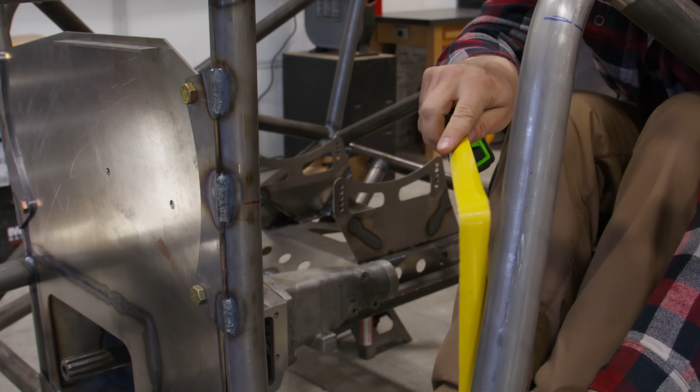So we got 17 inches. I'm gonna go ahead and mark that 17 inches here.

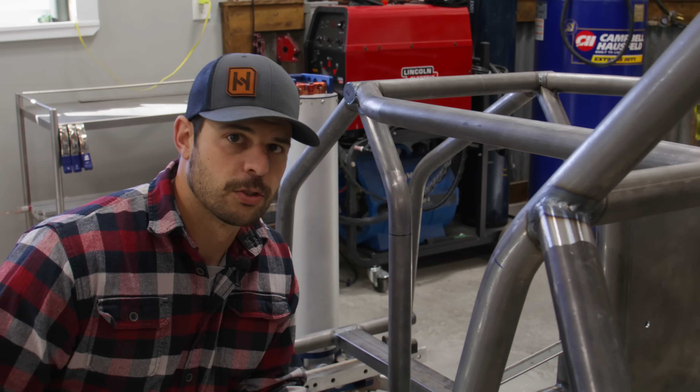Perfect. Next part, we're gonna be making the cardboard template that'll fit that. So we're gonna start by figuring out where the holes are that we need to have inside the sheet metal template to transfer onto our cardboard. We'll come up here with a level and hold it somewhat similar to where we just made those marks for the pedal height.

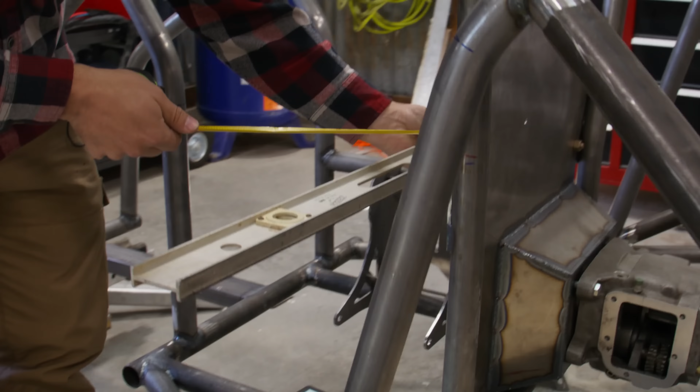Since this bar is kind of kicked out on the bottom and on an angle, we gotta figure out where this location is in comparison to this location. So I'm gonna come in here and make a measurement - it's 3 inches.

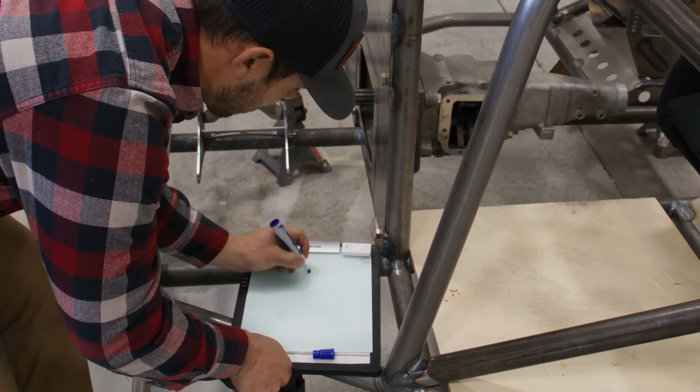So we're gonna come down here to the handy dandy whiteboard and draw our 2 holes. We're making a measurement from here to here - this measurement is 3 inches. The last measurement we need is a center to center in this direction.

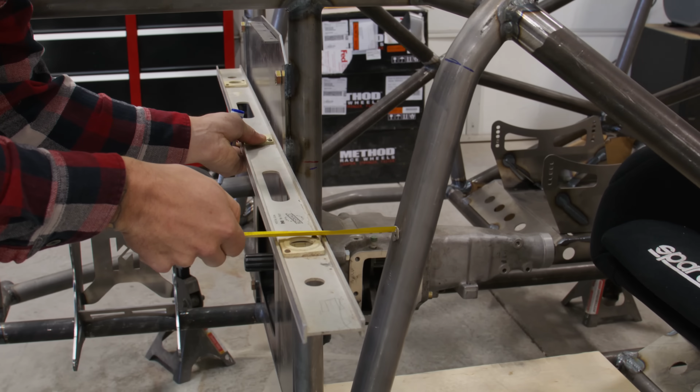So we're gonna come back to our hole, make a mark, and kind of line it up. The cardboard template's getting close right now. Then we're gonna come back in with our CAD work and be a little bit more precise.

Transfer these measurements down here off of our level. I got about 11 3/4. So now we have these.

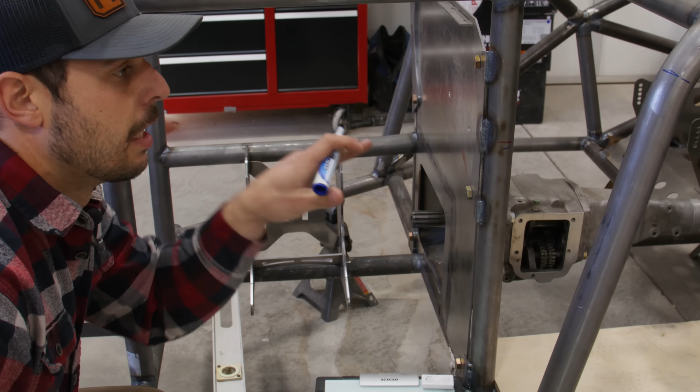We're gonna go ahead and take these measurements and transfer them to the cardboard. Get that cardboard template in here, do any trimming that we need to do, then we'll go to the CAD.

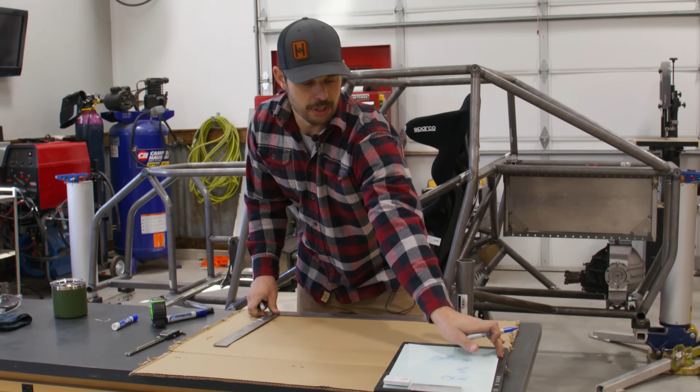So now we're gonna be taking those measurements that we just took and bring them down to the cardboard. We need a square, because the measurements we took are nice square measurements. I'm gonna use 2 different Sharpies to make it a little bit clearer. The 2 measurements we took were 11 3/4, and from center to center of the tubes on the horizontal axis. Then we're gonna take a 3-inch measurement up to the bottom, or the tangential part of that tube, and mark that location.

Lastly, we just need a little bit of space around these. So we're gonna add some space around them for the template, so we want about 1/3 of engagement on both sides, here and here.

We're gonna cut this template out, take it, put it in the car, and then make any adjustments that we need before we take it to the CAD.

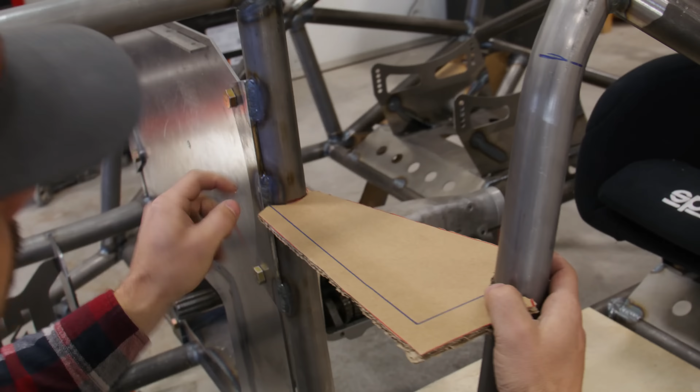So now that we got the cardboard cut out, we're gonna go ahead and put that in the car and check those measurements that we just took. We're gonna line those measurements up with those lines that we drew earlier when we had the brake pedal up.

Now we can see that we have a nice, decent tight fit on both sides, which means our measurements are close. Since we're happy with those measurements, we're gonna take them now, go to CAD, and draw them up.

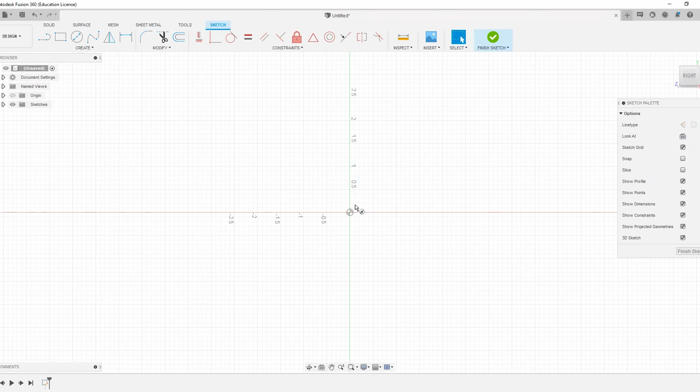So we have our cardboard design, and we know where our 2 locations are that fit pretty well. We need to take this and get it into the computer so we can start either doing a paper model or maybe a harder template model that we can justify. Then we'll go to SendCutSend.

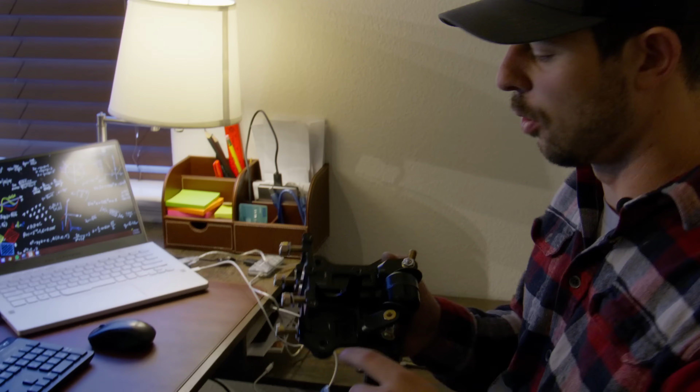Now that we have those 2 located, what we want to do next is measure the hole pattern of the bolts for our brake pedal, as well as any clearances we're gonna need at the bottom of the part, and apply those to this design.

So I spent some time, and now I have a hole pattern that matches my brake pedal and a slot that allows the brake pedal to go through the entire assembly.

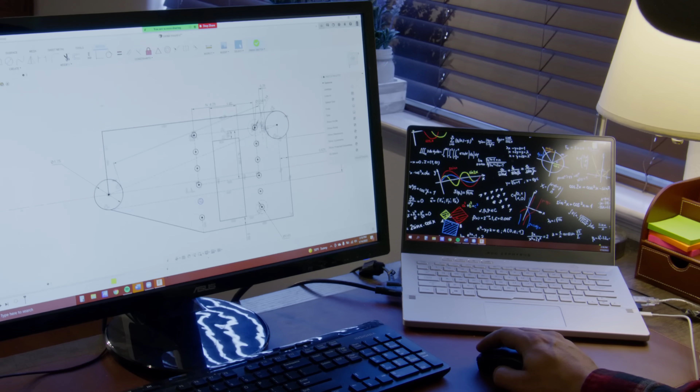So if we look here, I have a hole pattern that's every half inch. Since it's a 4-hole pattern, it's gonna allow us to have 3 different orientations and an inch difference in front to back orientation.

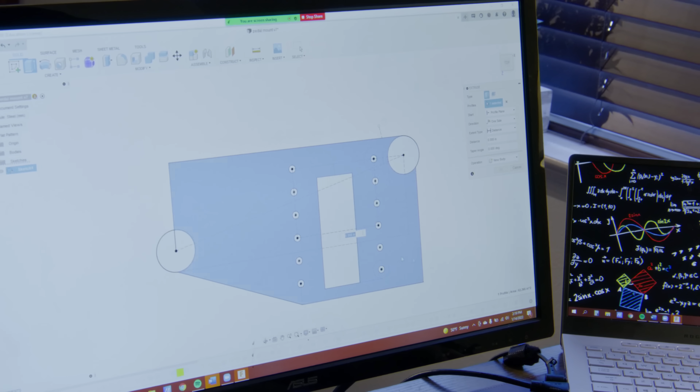This slot is also just fitted to the brake pedal that we're gonna be using. So typically what we're gonna do is finish this sketch, create a solid off of it, and roll this up. I'm gonna be making this out of 0.135 steel, so I'll go ahead and use that as my dimension.

Sorry, my body's selected. We're gonna hide that sketch. Now you can kind of see how this part's starting to form in a 3D sense. We have these holes in their pattern, the brake pedal clearance, as well as the two tubes that we're gonna be trying to tie into.

Now the next step is we're gonna create a DXF. If you're gonna be using a paper doll model, now is the time you can create a sketch or a drawing off your CAD software, make a one-to-one drawing, print that out, apply that paper doll onto a piece of cardboard or wood, and transfer that template onto the wood or cardboard to use as your template.

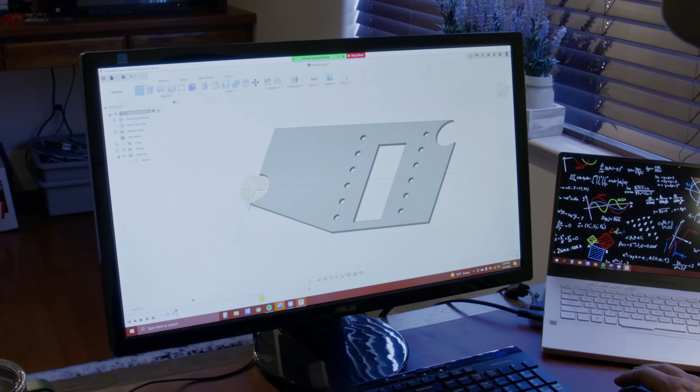For me, I'm gonna be using a CO2 laser that I have in my shop. I'm gonna be cutting out some thin wood that I got from a box store to use as the template. So to do that, we come back in, I create a sketch on this and finish it. This sketch creates an outline of what we just made, and that's what SendCutSend can use from us, and that's also what a CO2 laser will use.

So in this software that I'm using, I simply right-click, save as a DXF, and save it to the flash drive. Now that we have that DXF saved to the flash drive, we're gonna take that to my CO2 laser, cut this out, and do our first fit to figure out where that pedal needs to be front to back.

So we're back at the car now. I got the brake pedal and that freshly cut wood part that we just did on my CO2 laser. I'm gonna check the fit of this template before we get it in the car, to see if we have any interference. We're gonna go ahead and put it in here.

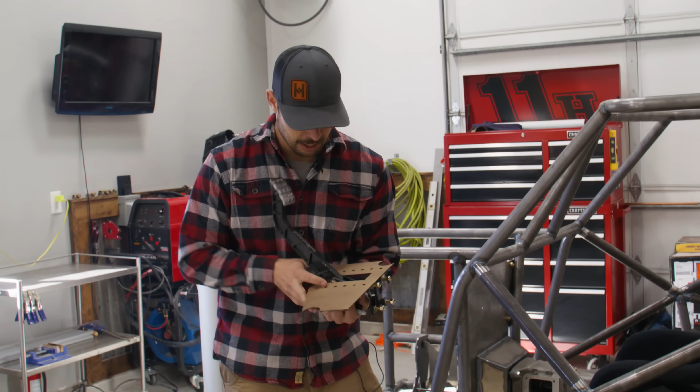And we do have a little bit of interference right here. There's a little pin that holds the pedal, so we're gonna have to make a little bit of a modification. We'll probably just take a little piece out like that on each side, get this pedal fitting in there nicely. Then we're gonna check it all in the car, figure out that back and forth pedal position, and then go to the final design.

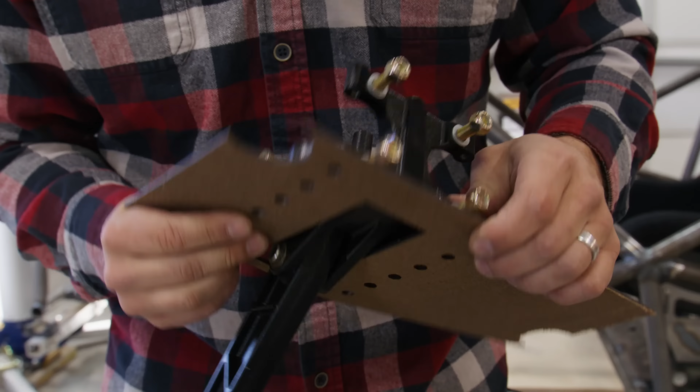So we do have a little bit more interference here. I didn't take into account for the bottom mounts of the master cylinders, but I think right now we can still use this template. We're gonna get it in there. What we're looking for is just knowing which hole pattern we're gonna be using so I can get rid of the rest of the holes, and then we'll add in the clearance for those master cylinder bolt holes.

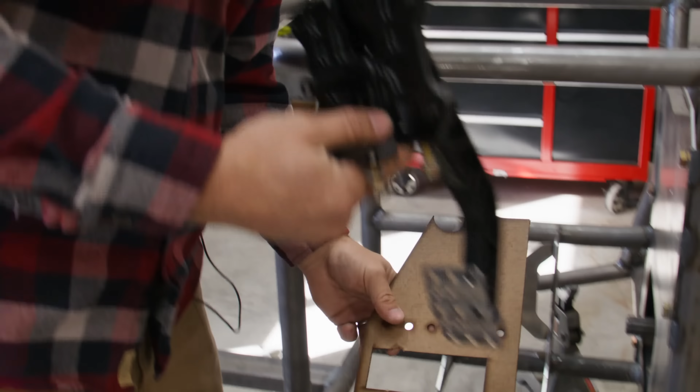So we're gonna take this, we'll take the pedal back out right now. A lot of times as we check this fit, we have a little bit of interference right here also, a little bit on that weld joint. So let's take our knife real quick and knock off that corner.

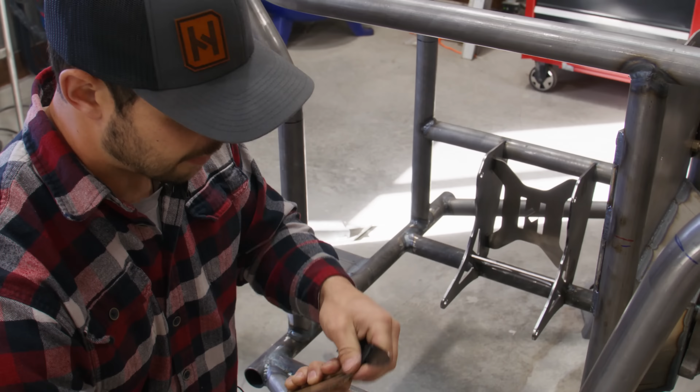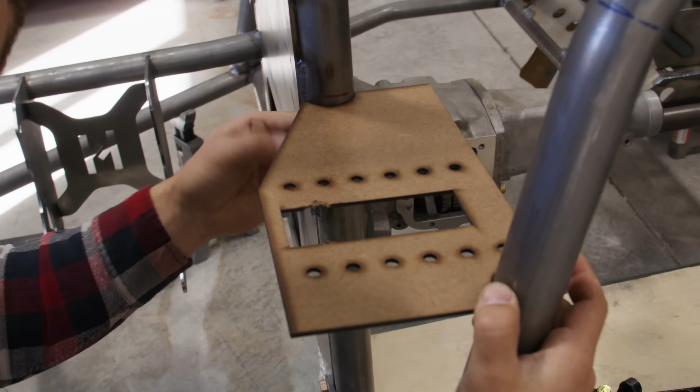This is all stuff that as we do this, we're gonna make sure that in our final design a lot of this is taken care of. Let's double check that part one more time. There we go, now we're fitting nicely.

So a lot of these little tight joints right here, since this bar is coming at an angle, it's a little bit extra tight right here. What I like to do is leave those corners really tight, and then when we get that laser cut part in metal, we'll do that final trimming in the metal so we have a nice tight joint and don't have to use as much filler.

The next step, now that we have this in here and it's held in place, is I like to use a hot glue gun. We're gonna hot glue some gussets in here so this piece is held in the manner that we want. We'll put the brake pedal in there and figure out that location, hold this up in here, and squeeze some hot glue.

We're going to let that glue cure up a little bit, add some tape to reinforce the joints, and then we'll get it in the car and figure out where that brake pedal needs to be.

So the design is in, it's reinforced for us to check that back and front. I'm going to have my buddy here help as we install the brake pedal while I'm sitting in the car.

There we go. We're going to start at the front hole and just kind of work back and forth to see what's right. Go ahead and move that back a little bit, Drew. Yeah, that feels about right.

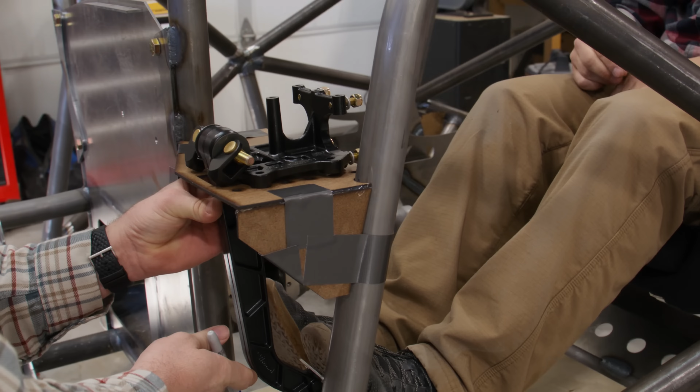So now that we have the holes kind of determined, we're going to go ahead and mark which ones so we don't forget, and let's mark these ones too here in the front, make sure. There we go, perfect.

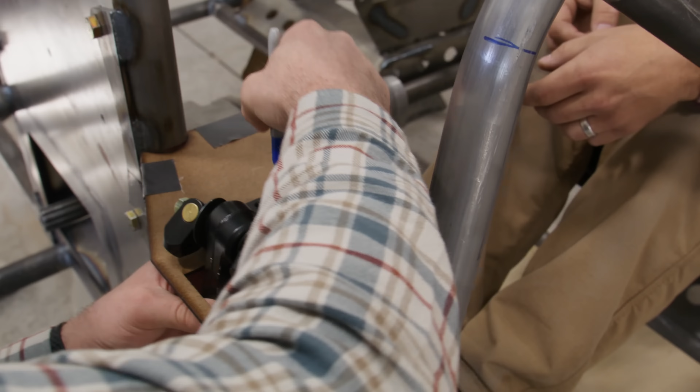Okay, so now we're going to go back to the CAD. We're going to take those hole patterns and all the little interferences that we learned, and start working on that final design so we can do one last template, check the fit, get those DXFs to SendCutSend, and get some metal parts started.

So I spent a bunch of time on this design, drank some whiskey. I think we're all good to go now.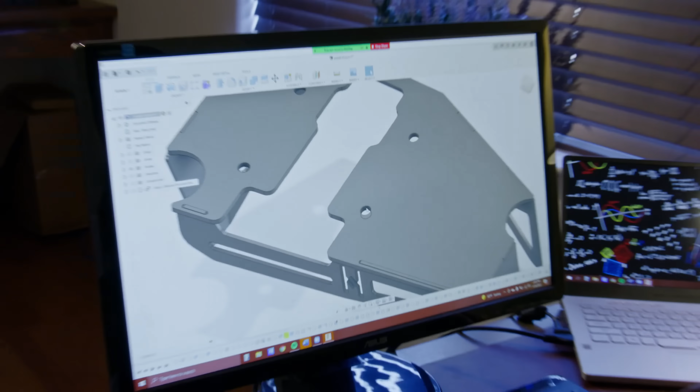So I want to talk about a couple specific things I did with this design that are important to think about. Firstly, typically with hole sizes for bolts, I either take the bolt dimension or the hole size of the part I'm using. In this case, since we're mounting a brake pedal into this spot, I use the same exact hole size that's actually on the brake pedal itself.

As you can see here, this is a 340 thousandths diameter hole, so my holes are going to be 340 thousandths in my part. That's going to be a 5/16 bolt most likely, so we have plenty of clearance. It doesn't have to be a tight fit, it's a nice loose fit. It's going to be fine.

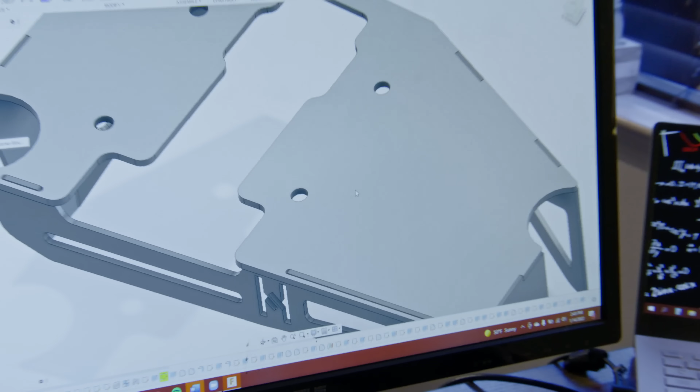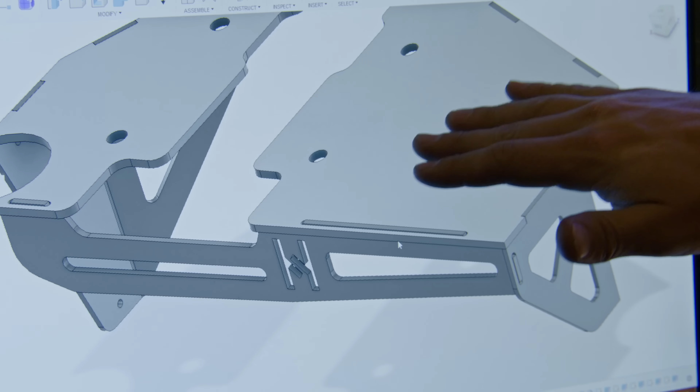Secondly, I used a tab and slot design in this part. That's for a couple different reasons, but mostly for fitment, making it a little easier with less clamps when it comes to welding. That's also going to help create a 90-degree joint in this corner to make sure my brake pedal pad sits nice and flat in the car, as this one right here registers up against the tube, and then this joint right here ties those two together.

But I do want to talk about the tab and slot design in a little more detail, specifically the tolerances on the slots compared to the tabs. So I went on SendCutSend's website and decided I'm going to use 104 thousandths thickness steel.

In my experience that steel comes pretty close to size, but we want a little bit of error between the cut thickness from SendCutSend and the part thickness from the sheet metal. The rule of thumb SendCutSend tends to use is to give 10 thousandths of an inch clearance around your part to make sure it's a slip joint. So if we zoom in on the part, we can see that on each side we have 5 thousandths of an inch.

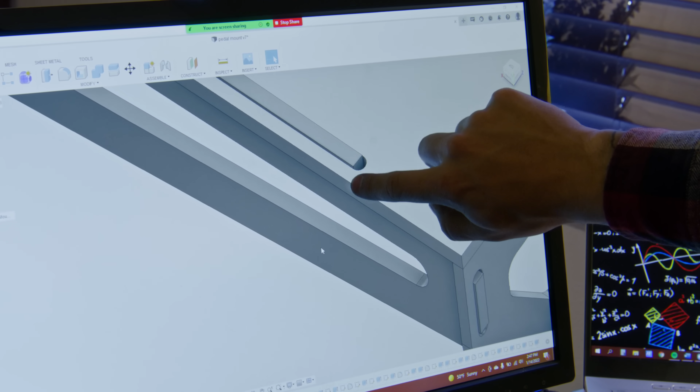And then I also rolled this edge to a half circle. In this part it's not going to see as much stress as the front, but it's a good overall design method since square corners can sometimes create cracking or a weak joint. So if I'm sliding this in and there's any hesitation, I can also bend right here, which will strengthen up this corner. Then we're just going to weld this seam through here.

Another thing I want to talk about is that with that tab and slot, I typically make my tab about 20 to 30 thousandths of an inch taller than the thickness of my material. That allows me to have filler material, so I don't have to feed filler while TIG welding—it's already there. I can just flow those two pieces of metal together and create that fusion weld. It makes it a little easier.

So you can see here I have a 135 thousandths thick part, and you can see how that's a little bit proud of the top of the part. This creates an easier joint. You can also see the same thickness here where I have a little bit of proud stick out, same design on the side here.

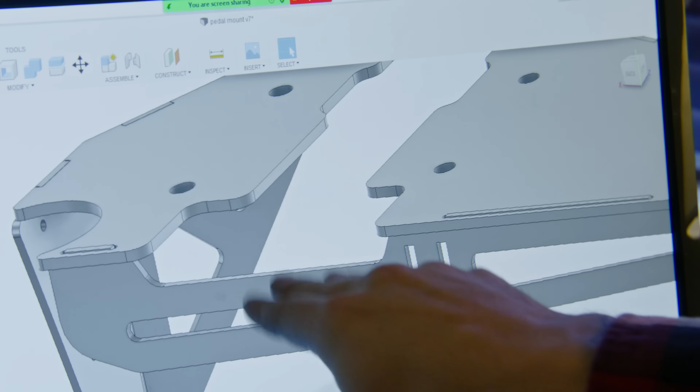This little cutout creates an area in which my master cylinders can slide into the front, because this is a reverse mount pedal. The master cylinders will bolt on right here, creating a little more clearance.

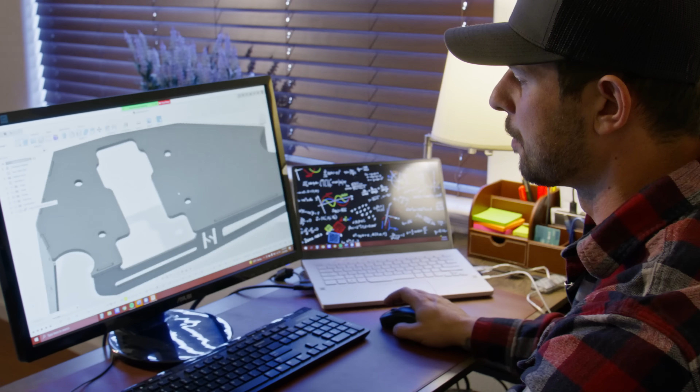Next, I added a bunch of holes for later in the design, for having sheet metal on the foot box. That's for finalizing this area. I added 1/8 inch holes, which will be for 1/8 inch rivets so we can tie the foot box and sheet metal back to this pedal mount.

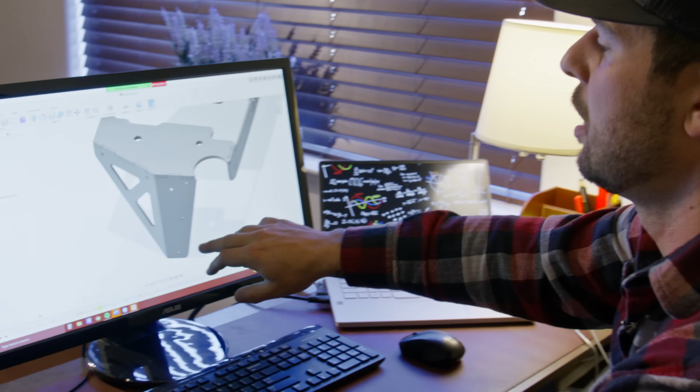So you can see here, I just added straight eighth of an inch holes. SendCutSend typically recommends about 5/1000 of an inch tolerance for hole sizes like this. These will be easy holes for me to chase with an 1/8 inch drill later on, so I'm not too worried about tolerances on these.

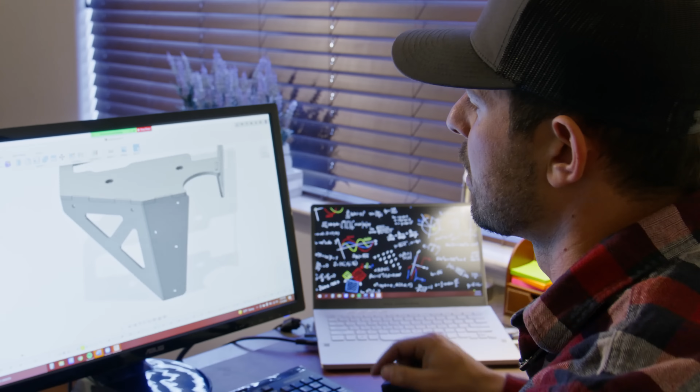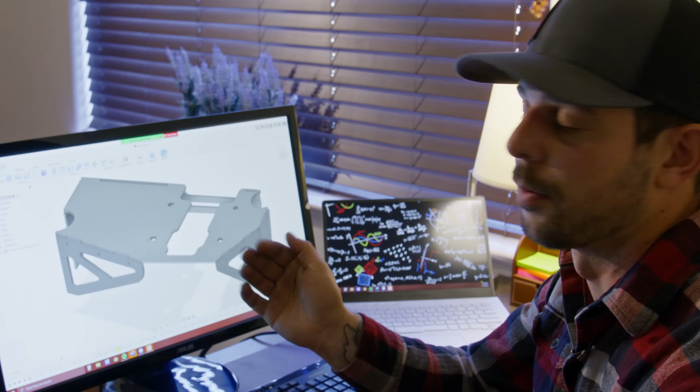I'll fit them to the rivets I'll be using later. If you're going to use specific tight tolerance holes, it's important to give that 5/1000 tolerance over a tight fit hole on a bolt. Look up the sizing chart for a bolt, find the tight fitting hole size, then add about 5/1000 of an inch to make sure the bolt will slip through, unless you can chase it with a drill and you're okay with that. But additional fitment will be required if you play that tight tolerance game.

So that's it for this part. We're going to do the same thing we did with the last template: create DXFs of all these parts, go to my CO2 laser, and cut these parts out of that same wood. We'll install it one last time to double check everything's good, and if so, we don't need to make any changes. We'll send these DXFs out to SendCutSend, they'll cut them out for us, we'll get them back and see how they fit.

If you don't have a CO2 laser, you can do the same method: create a 1-to-1 drawing, translate it to wood, thin plywood, or cardboard, cut them out, and do that same fitment I'm about to do. All we're talking about right now is making sure clearance issues and overall part sizes work, and that the gussets work in the design. See you in the shop.

So we have the final template in the car. I'm pretty happy with the design. We have the tab and slot design in the front for this backbone piece, which ties this area back together that we had to cut out for clearance for the brake pedal.

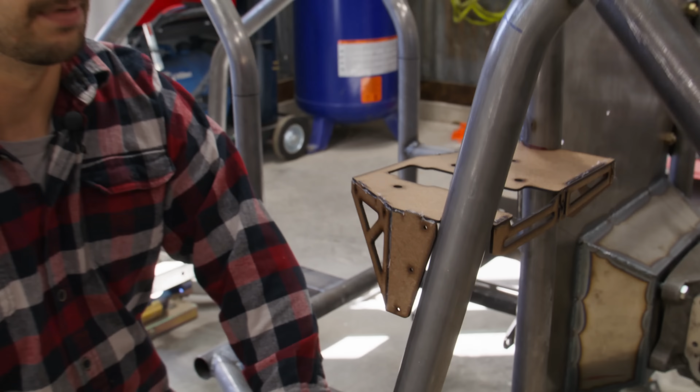We have this bent part here. With the template, I ended up cutting it, bending it in there, and re-gluing it back together. We're going to trust that SendCutSend gets this right for us. We have these extra holes added here and over here also, which will be for the foot box we end up building in later in the design. I think we're ready to send these DXFs to SendCutSend, get our laser cut parts, and get it welded in.

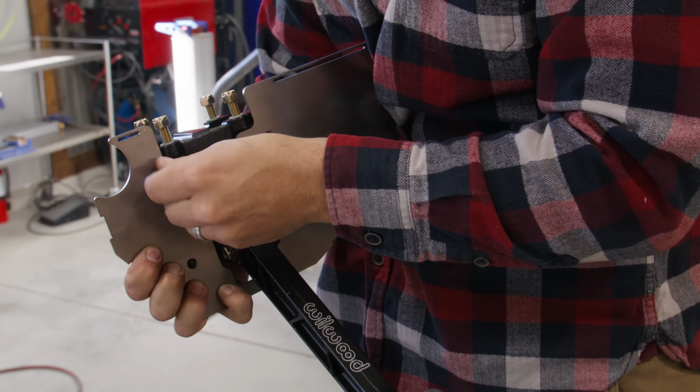So we got all the laser cut steel parts back from SendCutSend, and they're exactly like what we sent them. We're going to get this brake pedal installed onto this plate, make sure all the bolt patterns fit like we want, then install this on the vehicle next.

Everything looks really good. We're using non-nylock bolts right now because we're going to leave this brake pedal in there, keeping everything nice and flat as we weld and tack everything together. Then in final assembly, we'll put grade 8 bolts and nylock nuts in there, get it tightened up, and we'll be ready for the next step.

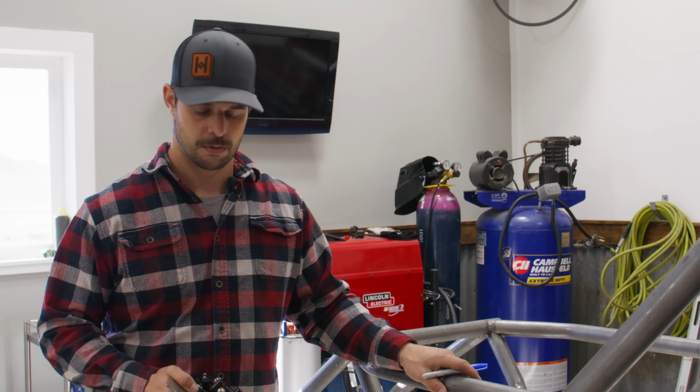Okay, so the brake pedal is now mounted on here. We're going to leave this on with its bolts nice and tight. This is going to keep this thing nice and flat.

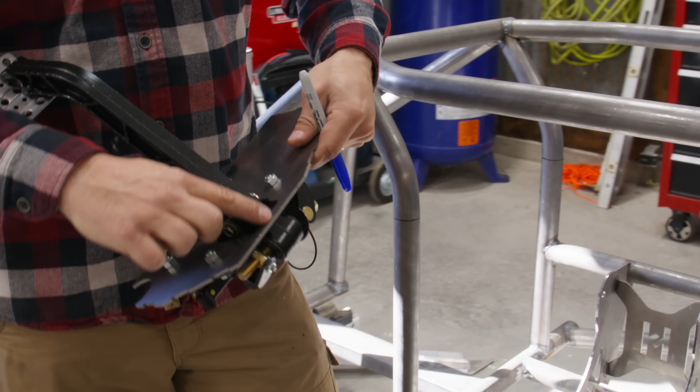It keeps the holes where we want them. Right now, this little web right here in this design is the weak spot. And so since we don't have the front tied in right here with that tab and slot design quite yet, these holes in this brake pedal are gonna keep this thing from getting twisted in a couple different ways as we get it kind of tuned into this chassis.

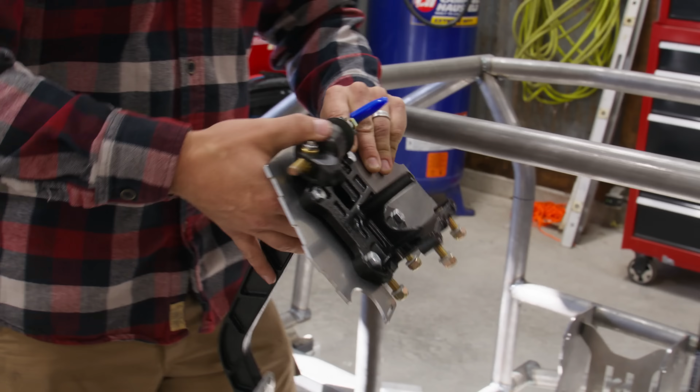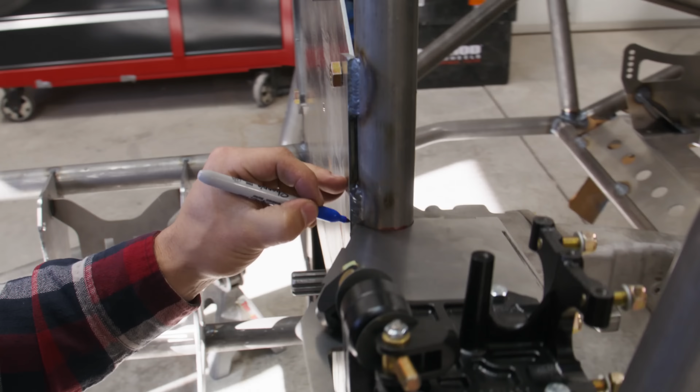So we're gonna go ahead, let's bring it in here. We're gonna bring it and get it down to our lines. So we can see right away, this weld right here, we have a little bit of interference right here. One big thing that we have to remember is that when we do a cardboard template or a wood template, they're much more forgiving than an actual metal part. And so most likely our wood or cardboard template folded right here and I actually didn't see that interference.

So we're gonna just go ahead and mark that. We're just gonna roll this edge away from that. That should give us a little bit more clearance. We can also see right here, this is most likely the same situation where the cardboard template and the wood template gave away. So we're gonna just kind of trace this out. We're gonna use the pipe to our advantage and trace that little thing out.

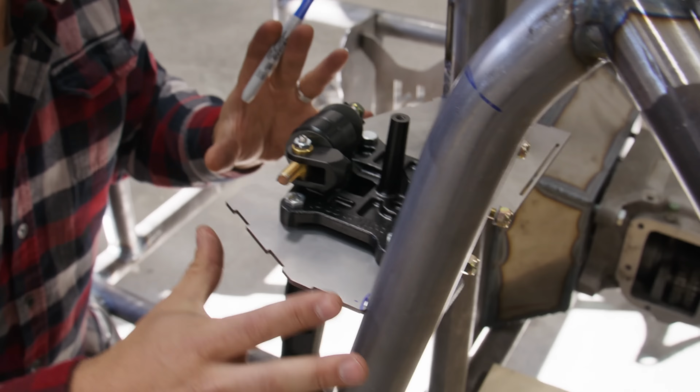Now we're gonna go to the grinder. We're gonna remove that little bit of material. We're gonna slowly work this part in here, get it in nice and flat. We'll throw a couple tack welds and then we're gonna add our gussets into the part, add that tab and slot into the part. Once it's all looking good, we'll finish welding it up.

So we don't want to take too much right now. We just want to slowly work it in. We want to take our time. We had really nice laser cut parts. There's no need to ruin them being too hasty with it. So let's come back over. We'll check those 2 spots that we just worked on.

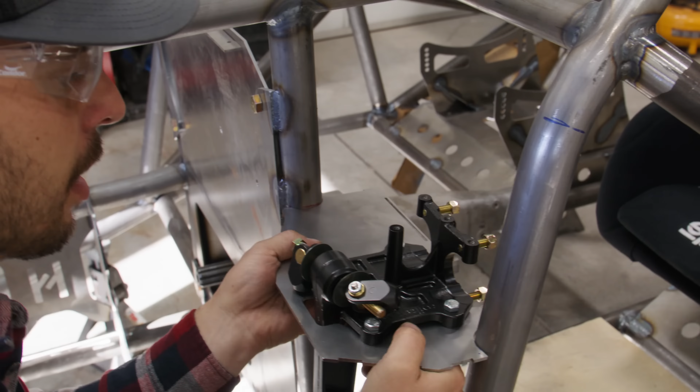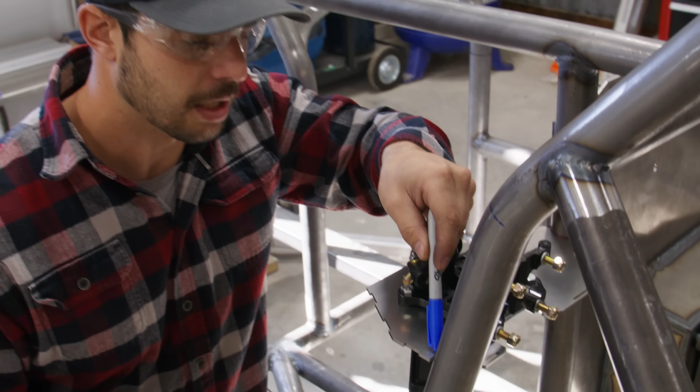Okay, so that looks great now. We have plenty of clearance there. And our part just slides right into place, right? So actually, we got it just about right first try. So we can see here that we have a little bit of clearance on the inside of the part. That has a little bit to do with the cardboard design giving and stuff, and we had a little bit of clearance issues, but no problem filling that joint up.

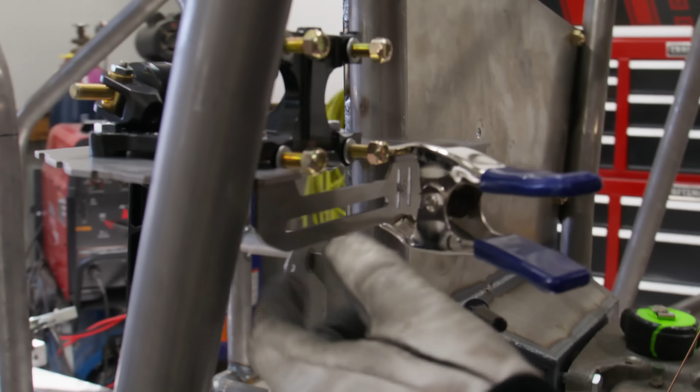Let's go ahead, get the welder out. We're gonna throw a couple tacks in the corners to get everything flat, then we'll start adding our gussets in and keep tacking everything else in as we go. So we're ready to tack this thing up. I did put that front support tab in here with the tab and slot. The reason why we did that is that that's the only thing that's actually inserted into this part. So as we're welding and stuff, I clamped it in there. It's not welded in yet, but it'll just be in there to hold itself in place

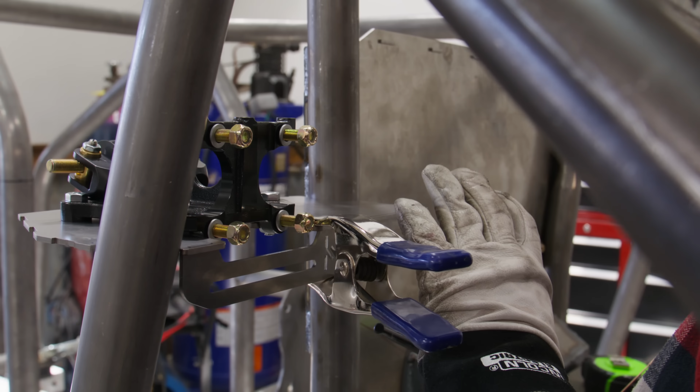as we start tacking this piece up. We're gonna start by just tacking up in this corner. We have a nice straight edge that's running across the top of the car here. We're gonna measure down after I tack this corner, measure from here to here and here to here to make sure that it's nice and flat. We'll throw a couple more tacks on the other side. Then we'll start adding all the gusseting.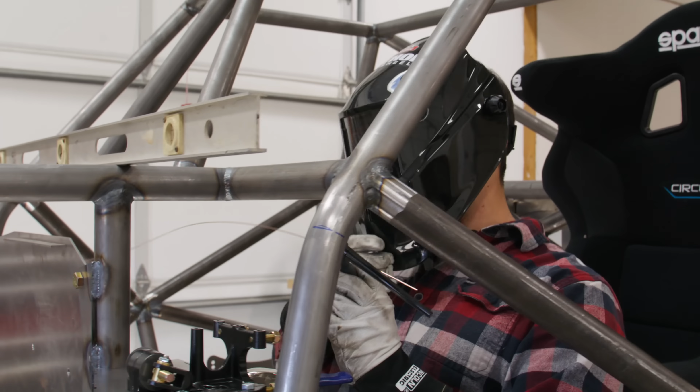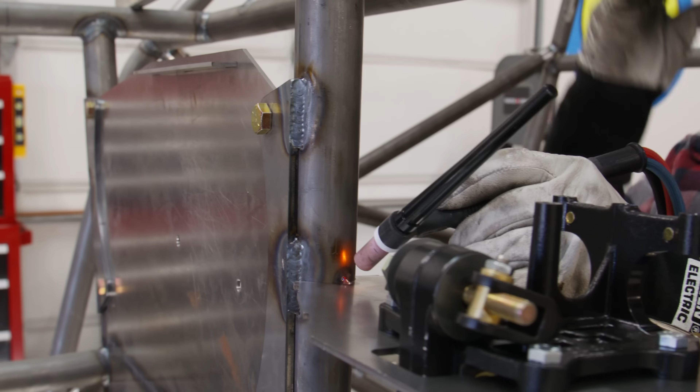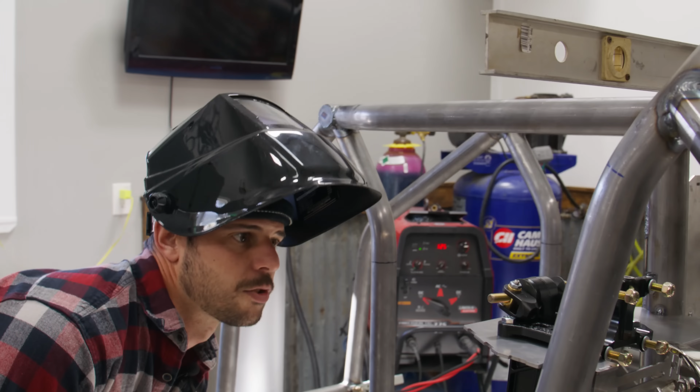All right, so we have a nice light tack right there. That's gonna allow us to make any small adjustments, but keep this thing from falling out as we do it. So I'm gonna slide out of here. We're gonna come back on this other side. We're gonna throw a measurement right here. So we got about 9 7/8. And about 9 7/8. So we're actually ready to go. We're nice and squared up. Looks good.

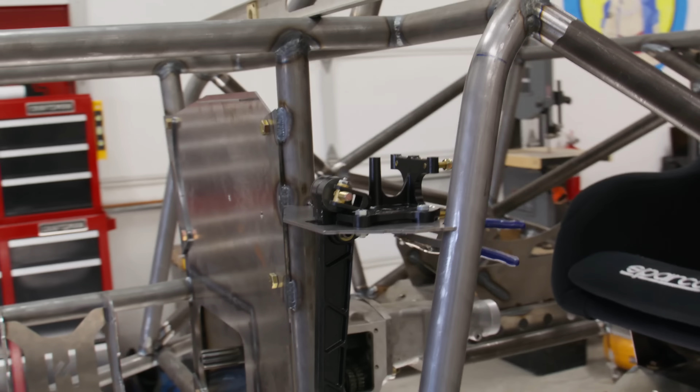Let's go ahead and throw another tack in this corner, and we'll maybe try to tack one in the back. Just double checking. Look at everything. Everything's looking okay. Do it.

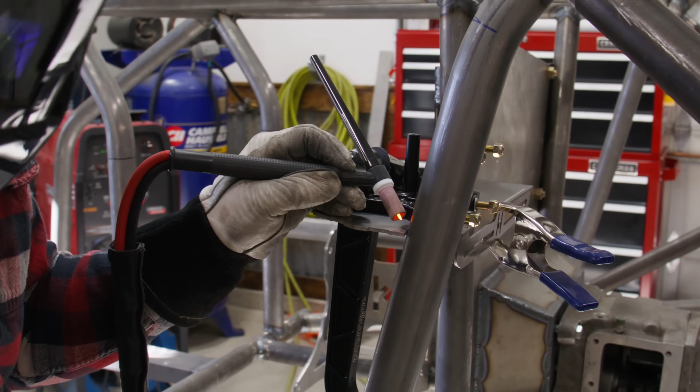Okay, I put a little bit of a heavier tack there since we actually know that this is where we want it to be. I wanted to start kind of solidifying this design into the chassis. We want it to have a little bit of flex here and there though, so that we can get those gussets into the places that they need to be.

So let's start with this bent one right here. This is gonna be one of the more critical ones since that bent piece has to align here and we want it to tie into this chassis. We're gonna have to probably do a little bit of massaging.

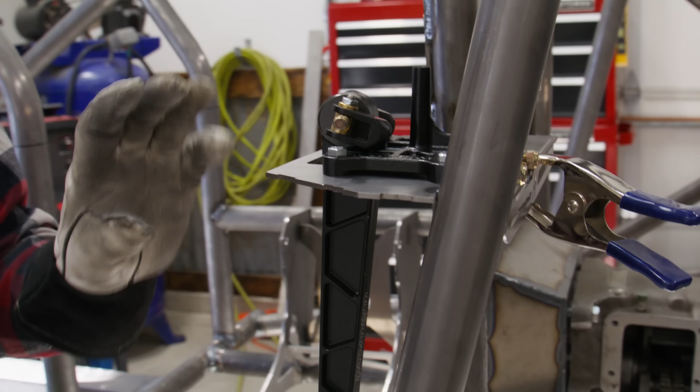We did remove a little bit of material on that backside right here, and that gusset went up into that corner, so we're most likely gonna have to do a little bit of grinding to get that to fit in there right. The next piece that we're gonna be putting in here is this angled and bent piece. We're gonna be throwing it up in this corner here.

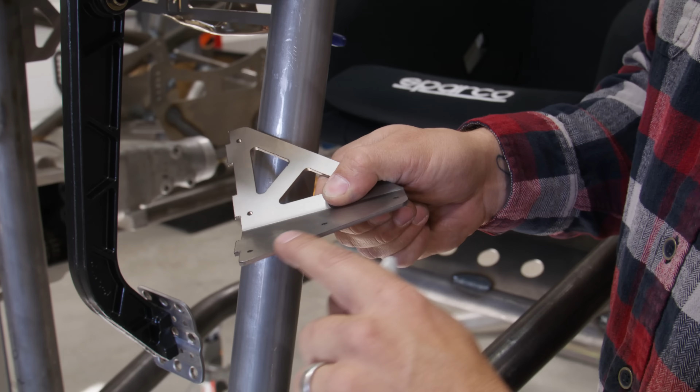There is gonna be a little bit of trimming to do because that wood piece that we had in here and that cardboard and stuff is always a little bit more forgiving. So what we're most likely gonna do is have to trim back and chamfer this edge. And then since we did remove a little bit of material here, we're gonna have to pull back that corner a little bit also. So let's just kind of hold it up, see how it looks.

You can definitely see that we have interference down along this whole edge, but the angle looks pretty close. And so we're gonna have a little bit of flexibility to get this thing a nice tight fit. So let's go ahead and mark it with our Sharpie. We're gonna pull that corner back to match this little spot here. And then let's go ahead and flip this over, and we're just gonna mark this whole entire edge, just to remind ourselves that we need to go ahead and chamfer that with the grinder.

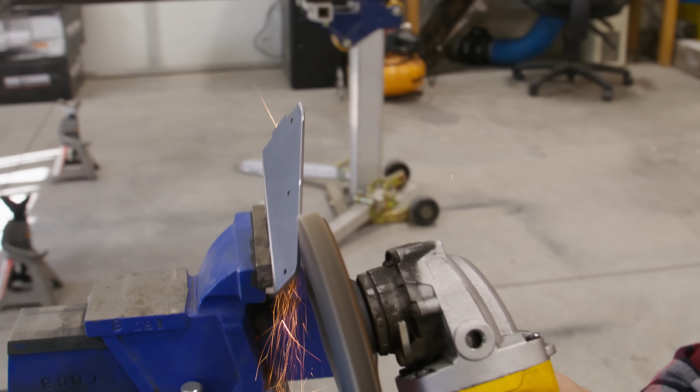So we definitely are still having a little bit of interference here. In all honesty, I think that that's still a pretty good fit. I think I'm just gonna pull back this edge and chamfer it the reverse way, just to give ourselves a little bit of room to throw a weld in there. And then let's go ahead and tack this in, and then we'll move to the next part.

So we're back with the welder. We're gonna get this piece all tacked in. Since that corner has got a little bit of interference, I'm gonna get this piece worked up in there. And then I'm gonna tack that one corner that has that interference. Nice tight fit here, so we gotta get it just right. There we go. I'm gonna tack this corner up here that has the interference first, and then we're gonna actually just roll this thing in.

And so the beauty of this is that we can do a little fusion weld here, so we don't need to use any filler. There's a little tack weld. There we go. So now we should be able to roll this piece up into place just like that. And then we'll do another little fusion weld up in the corner here. Beautiful. Now we got a nice tight joint.

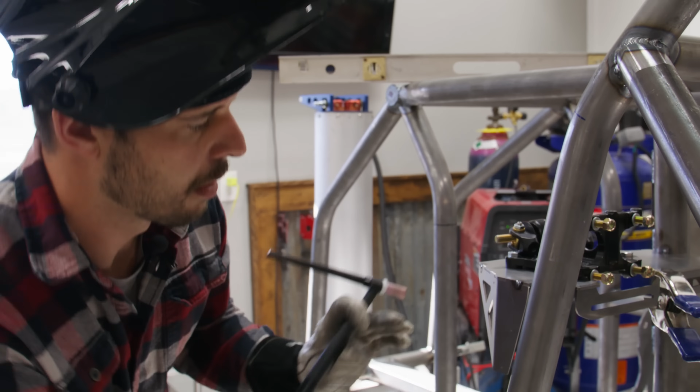So I'm gonna wait to put this little joint in here until we get the other gussets in place, just to make sure that if we need any flexing in order to get them into place, we have that room to do so. I'm gonna go ahead and actually add one more right here in this corner, and I'm gonna push down a little bit on this to make sure that everything's nice and tight, and then we'll move on to the next part.

So now we're gonna be working on these tab and slots here. The beauty of these is that what I like to do is have that 20 or 30 thousandths stick up that we had in the initial design. That is gonna be used as the filler material. And then we're just gonna start on one corner. We're gonna tack each side of this, and then we can just run the bead down it and work that material in.

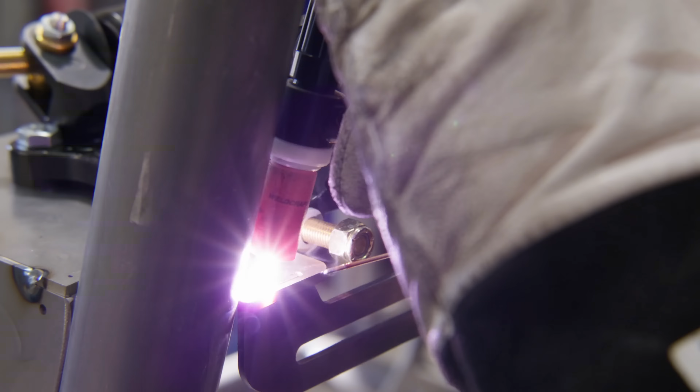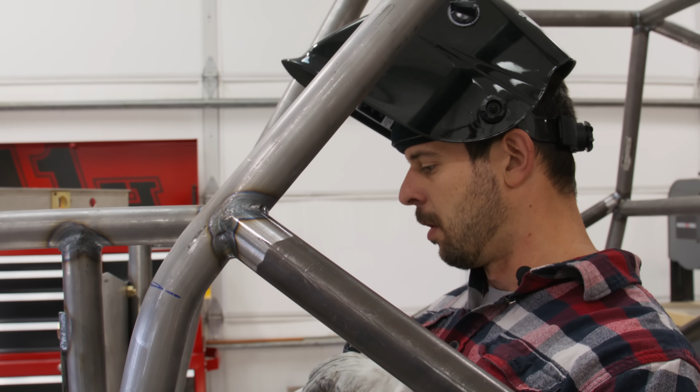Okay, so now that they're tacked in, I feel pretty comfortable. We're just gonna work that little bit of extra material down into that part. That's gonna pretty much make that front piece and that top piece a one-piece design now. We don't need any filler wire actually. Here we go.

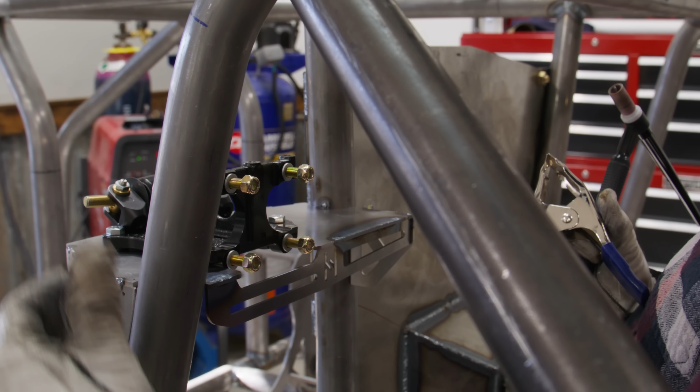Okay, so now that we have that front piece all in there, that's a really important time to have the brake pedal mounted in there. That keeps this thing nice and flat. We just put a lot of heat into a long run on this part, so to keep it from warping, we have it tied in to about 3 or 4 different places. We have this keeping it flat, so we should be pretty safe to proceed with some longer welds at this point.

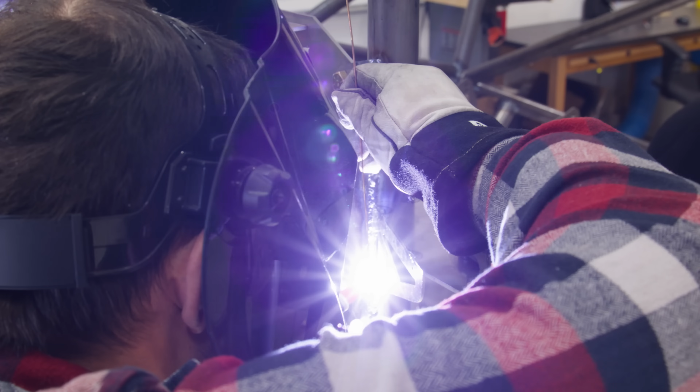So that's it. I'm super happy with how the design turned out. The brake pedal's in, everything looks great. That's how I go from cardboard to CAD to SendCutSend all the way to a finished part.